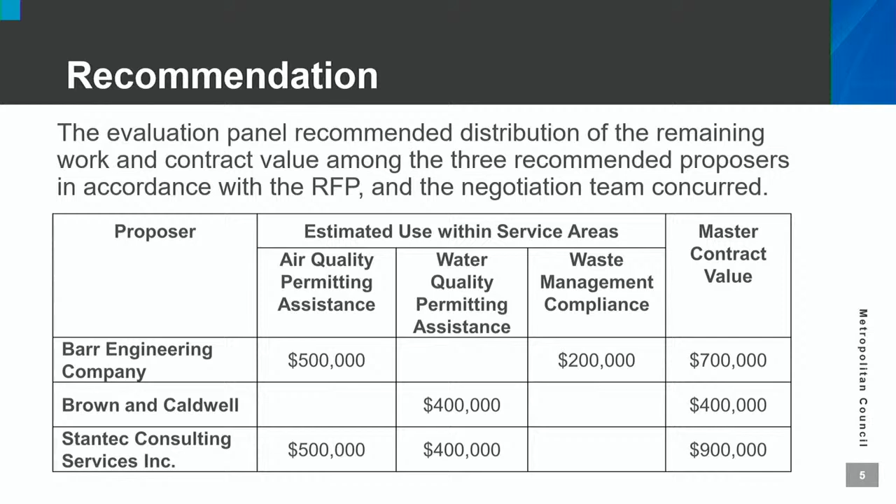The proposed action before the Environment Committee is that the Metropolitan Council authorize the regional administrator to award and execute contracts 23P092 A through C for wastewater treatment plant environmental permitting assistance for a cumulative not to exceed amount of $2 million in service areas and amounts as follows.

Barr Engineering Company, 23P092A, Air Quality Permitting Assistance and Waste Management Compliance, $700,000. Brown and Caldwell, 23P092B, Water Quality Permitting Assistance, $400,000.

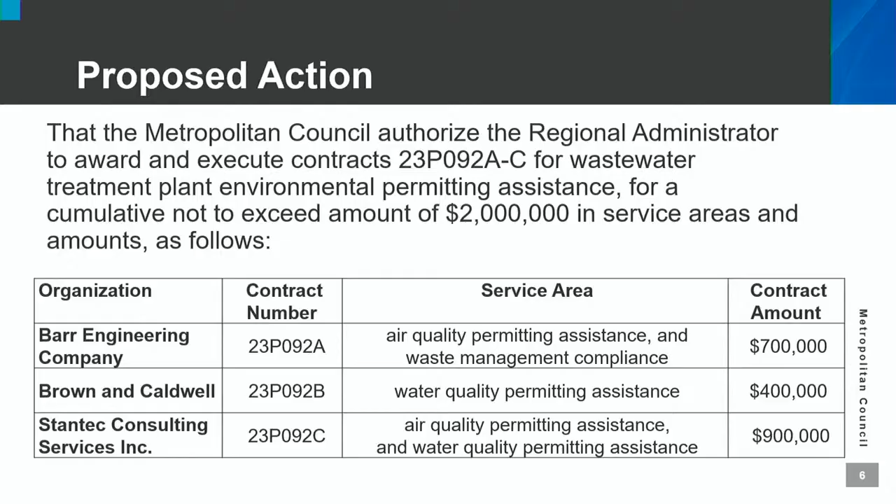And Stantec Consulting Services Incorporated, 23P092C, Air Quality Permitting Assistance and Water Quality Permitting Assistance, $900,000. With that, I could answer questions.

Any questions? Yeah, please, Councilman Carter. Yeah, I was just wondering, just for my enlightenment, the Brooks Act process, is that just engineering and architects, or what does that refer to?

Mr. Chair, yes, since this is a PFA-funded project, that allows us to do first a technical evaluation of technical proposals, and for us to make a selection, followed by the review of cost. So it's the two-step, an evaluation and negotiation, and it has to do with the PFA work.

Public Facilities Authority, right? So it only applies to contracting with engineering and architectural firms, or that's what I'm trying to get at. Thank you. Jody will help. Yeah, because I think it might apply to other contracts as well.

Welcome. Thank you, Mr. Chair, council members, Jody Jacoby, Chief Procurement Officer. So the Brooks Act is for federal contracts where there's licensed and certified staff. The primary consideration, as Rene accurately described, is two-step, to ensure that the consultant has the highest technical rating and they're scored and ranked in that order. Then the cost proposals are sealed and they open up the cost proposal in that order of technical rating and work to negotiate. They do one at a time, but it's that technical rating because of that specialized certification and the requirements, that's of utmost importance.

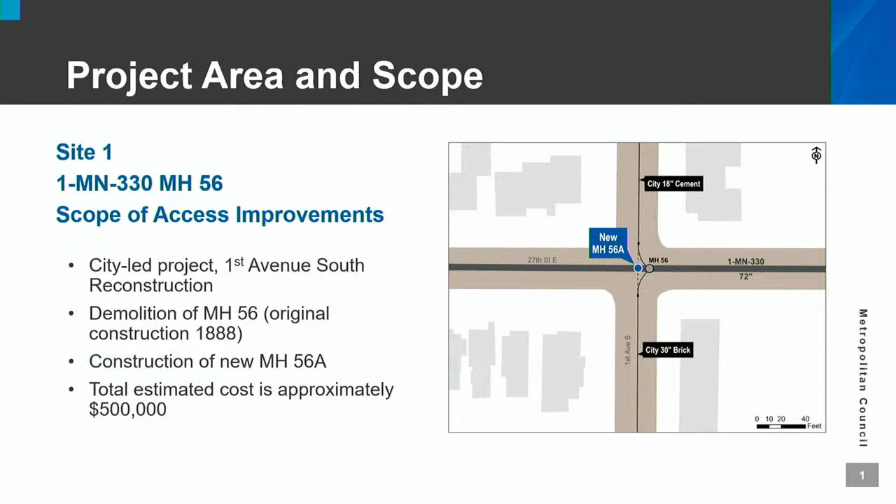The second project that we're working on with the city of Minneapolis is on 1MN310, manholes MH10 through manhole 16. It's part of the city's 2nd Street North sanitary sewer improvements project.

So they're doing some work on the city sanitary sewer. We had planned some work on 1MN310 in this area as well. This is allowing us to get in and do some work on those manholes that we had planned on rehabilitating as part of that project, in conjunction with the city of Minneapolis, so we're not coming back and tearing up their fresh new road again.

So the project, again, is being led by the city of Minneapolis. It includes the reconstruction of manholes 10, 12, 13, 14, 15, and 16, as you can see on that map, extending from Plymouth Avenue North all the way up to just south of West Broadway on 2nd. We'll be demolishing manhole 11 and constructing a new structure.

We're estimating that the total project cost is about $3 million, a little less than $3 million for that work. Part of the reason for that cost is just the depth of the structures there. We're looking at about 30-foot deep manholes that we're going to be excavating in a fairly narrow corridor on top of a 54-inch RCP pipe.

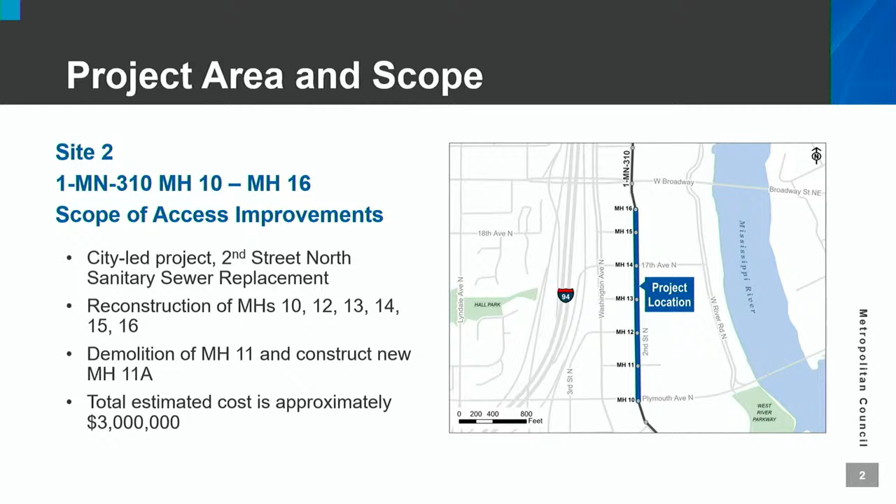So with that, our proposed action is that the Metropolitan Council authorize its regional administrator to execute a cooperative construction agreement with the city of Minneapolis for the design and construction of access improvements to interceptors 1MN310 and 1MN330, for an amount not to exceed $3,500,000. Thank you. Questions for Mr. Wedin?

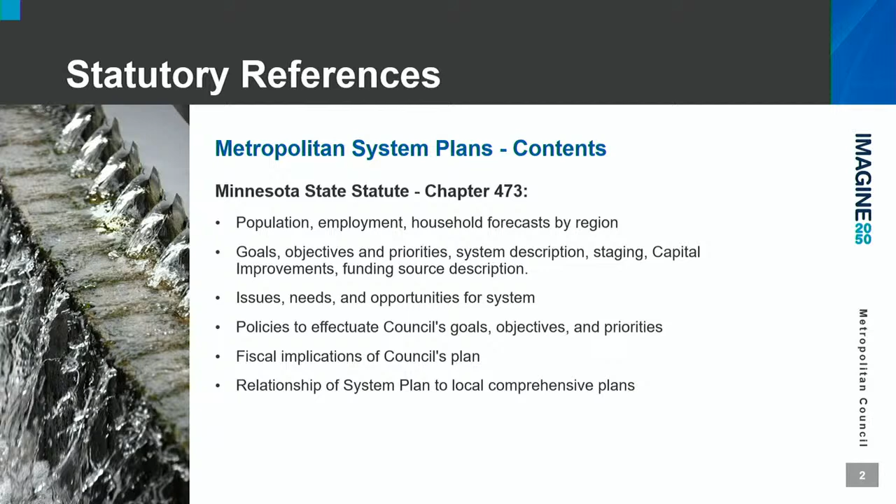Or in some cases, if the local plan is inconsistent with the system plan, the system plan can be updated to reflect the local plan's plan for service. A good example of that was when Credit River came in and requested service for the first time. The system plan at that time had identified service to Credit River as being long-term, post the 20-year planning horizon. So this time around, we will revise the system plan to show that first 20 years of staging, with Credit River reflected in their 2040 plan as being requested for service.

Again, like the regional development guide, the system plan gets updated every 10 years. That outlines a 20-year vision for service provision. It includes the population, household, and employment forecast, as I mentioned previously, and projects the resulting wastewater flows from that projected growth, broken down by community and each of our 9 water resource recovery facilities.

Those wastewater projections are then compared against our system and the system capacity that exists. In cases where we determine that the flow projections exceed that capacity, the system plan will program the necessary improvements that will be required in order to provide that level of service.

I believe we made a presentation here a couple of months ago when we went through the scenario planning, and that was part of the exercise with the initial rollout of forecasts, as we identified what that growth resulting from those scenarios would be, and then identified what system capacity enhancements would be required.

Because the planning period looks out 20 years from a service capacity requirement, and systems are usually built beyond that 20-year planning horizon, it's very rare that we find the forecast in the 20-year period actually represents a need for capacity enhancements, just because the design of the system is well beyond that 20-year period. So it's very rare that system capacities or system improvements need to be included in the system plan. It does happen, and this system plan will include some improvements that reflect a need to accommodate future growth.

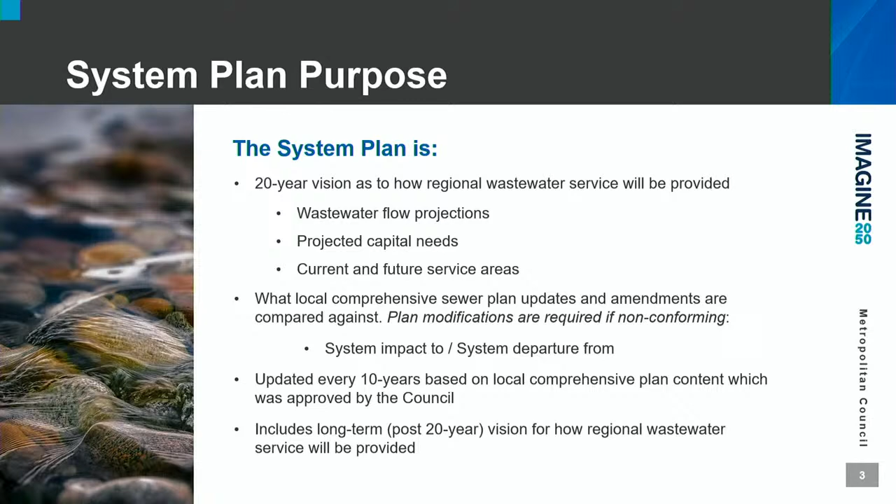This slide here basically was the same slide that I presented back in August. It provides a high-level overview of the system plan content, so I won't go through it again. However, I think it's important to point out that the system plan focuses on that first 20-year planning horizon, but it also identifies some of those post-20-year projects that we have identified as being necessary to accommodate the long-term growth.

There is one note on here, looking at this slide, something I didn't actually pick up in August. It does identify Cologne as a future facility, and in the system plan - both the last one and this proposed plan - it identifies the need for a treatment facility in Carver County. It's likely that regional facility will be centralized somewhere in Carver County, and when you look at a map, the city of Cologne is pretty much in the center of Carver County. So the intent and likelihood would be that this long-term Carver County facility would be located somewhat centrally in Carver County, but probably in close proximity to the Minnesota River. I just wanted to point out that the site for the Cologne facility has not been identified yet - that would be part of a future study.

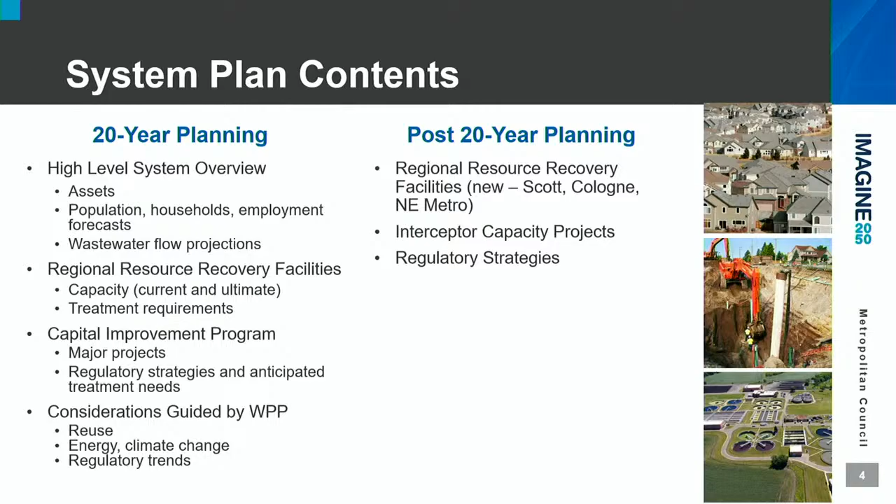So I mentioned that these areas represent what could be served with our existing facilities, but I will say the regional wastewater system is expanded as necessary to facilitate development in the communities consistent with their approved comprehensive sewer plans.

So our upcoming work ranges from acquiring a site for a future Scott County water resource recovery facility, to a new interceptor to serve the Elko New Market and Farmington areas to relieve some interceptor capacity concerns, to serving the Hastings area with new infrastructure.

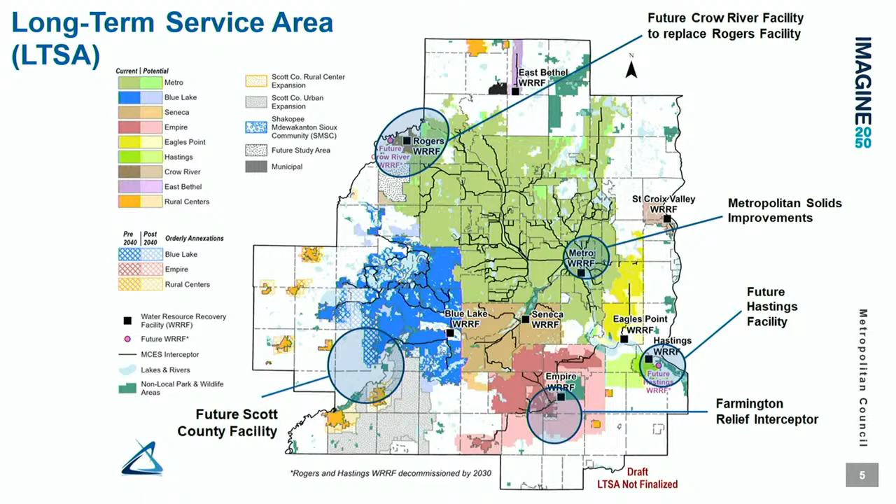Councilmember Wolf has a question or a point. Thank you, Mr. Chair. When I started at the council, it was $4 billion. So, I last heard 7. Yes. Wow, that's more than double.

Yeah, significant, indeed. So for how those areas are determined, we consider a variety of inputs. We look at the capacity of each water resource recovery site, considering future regulatory scenarios. We look at the potential developable surface area that could be served by each facility. We look at the capacity of existing interceptors, the potential for new water resource recovery facilities and service area revisions. And then we consider wastewater generation rates, which are based on location, proximity to transit, and major highways and physical features of the area. So there's a lot of different components that go into how that map is developed.

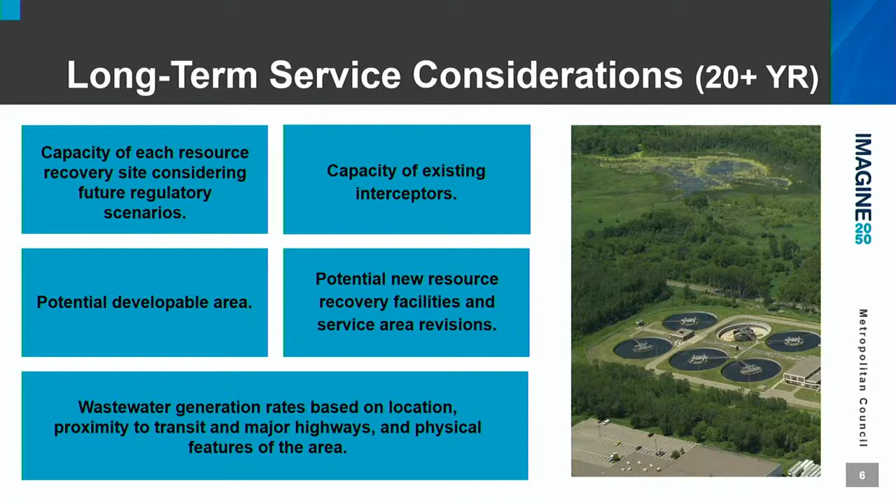So the system plan also describes our capital program, which provides capital investments to preserve and rehabilitate our wastewater infrastructure, meet more stringent water and air quality regulations, and expand the system capacity to meet regional growth needs.

As mentioned before, our projects span the entire region in different types of infrastructure. Some of our projects at a high level include interceptor rehabilitation or new construction, same with lift station and flow metering, and then resource recovery facility work, which could be expansion, upgrades, rehabilitation, as well as solids processing improvements.

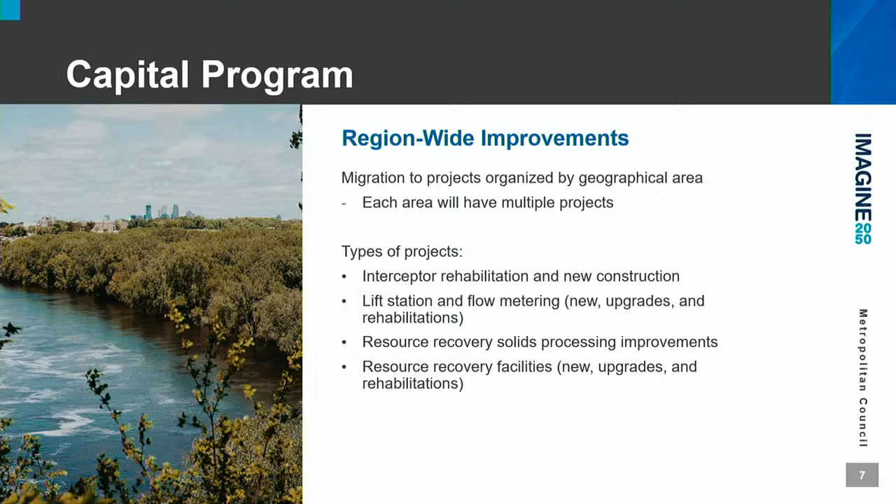So the projects in our capital program are categorized into the 3 objectives on the slide. We have asset preservation, which preserves our existing investments. We have system expansion, which are projects that expand our system capacity through resource recovery facility or interceptor extensions. And then quality improvements, which may address safety, regulatory standards, sustainability, et cetera.

The amount we spend in each objective varies year to year depending on what's in the capital program. From 2014, a majority of the funds were spent in the asset preservation category. In the near future, we may see a shift where the majority of funds will be spent under the system expansion category as we expand with new water resource recovery facilities, facility work, and related interceptors.

In the next 6 years, we see projected capital investment split to 37% on interceptor work and 63% on resource recovery facility work. We use the estimated value and the useful life of our assets to identify an asset preservation investment objective, or our annual target spending amount to maintain the system.

So ignoring the $9 billion value I just shared, previously to this round we were using $7 billion as the present value of our infrastructure. Using that value and the average useful life of our infrastructure, we set a goal of spending 1.8% of the asset value per year, or around $130 million in rehabilitation. We feel that that level of investment is necessary to maintain our system.

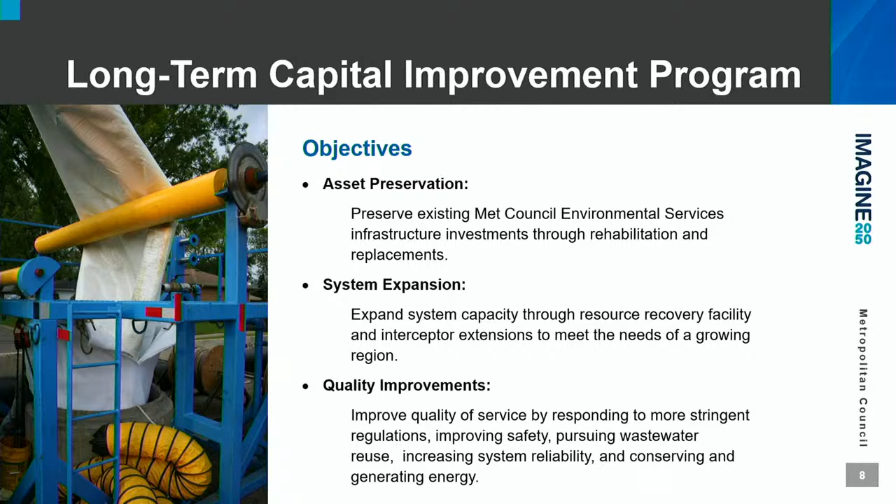Here's that other slide I referenced with some upcoming projects. Again, you can see it spans all types of infrastructure across the region. We spend about $110 million on average per year on capital projects. In the first part of this planning cycle, over the next 5 years, we might see a higher spending rate because we have a few larger projects using our design-build project delivery method. These include water resource recovery facilities, solids processing improvements at the Metro facility, an office and lab update or new building at the Metro facility, and a Scott County resource recovery site acquisition, just as a few examples.

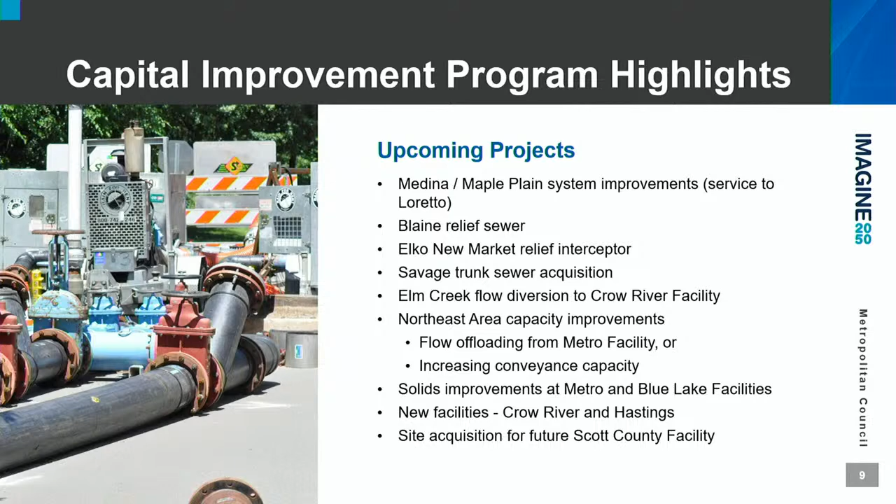So this system plan is just a continuation of the 2040 system plan. The wastewater long-term system planning capacity time horizon goes beyond the 20 years of the regional development guide; we're more of a 70 to 80 year planning cycle. Overall, population forecasts from the regional development guide normally don't exceed what we're expecting in the next 20 years for the wastewater planning horizon, so we don't have too many new additional capacity enhancements or investments other than what's already in our wastewater system plan.

Another component of the system plan is our resource recovery strategy. As supported by the change in name to water resource recovery facilities, we continue to invest in activities that recover resources—for sure water, but also energy and nutrients—and we investigate other opportunities. In the system plan, we describe current and future resource recovery opportunities, the things we want to do more of, and the things we're keeping tabs on to potentially implement in the future.

Our current efforts include water, through our wastewater treatment process, where our product is the clean effluent downstream with discharge to receiving water bodies. We have energy and heat recovery—we recover heat from incineration of solids waste, and we harvest biogas from biosolids production. Biosolids is also a resource we recover; it's a nutrient-rich fertilizer we provide to local farmers and other partners. We also have internal reuse at a few plants for internal application like cooling and wash water.

In the next 20 years, we are investigating and may implement, if and when practical, thermal heat recovery from wastewater effluent, and regionalizing our solids management so the entire region can benefit from those recovered resources. We'll look at other heat recovery opportunities at our facilities and continue to support wastewater reuse efforts across the region.

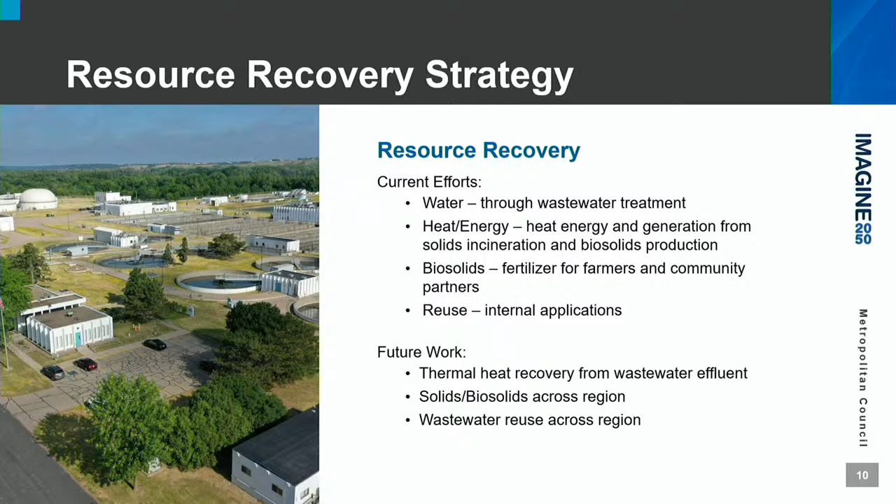Specifically, for phosphorus, in response to past regulation, the Met Council has taken around a 70% reduction in permitted total phosphorus levels since 2010. Most of our water resource recovery facilities now have biological phosphorus removal systems and consistently meet standards.

For nitrogen, we've just recently received a nitrogen reduction strategy plan for wastewater treatment facilities from the MPCA. This document will include the nitrogen reduction plans that will be added to our wastewater permits during their reissuance. We just got that this month, so we're in discussions for next steps and our response.

For sulfates, an existing 1973 water quality standard, implemented to protect wild rice, will be implemented in the NPDES SDS permits. This will likely affect most of the Met Council water resource recovery facilities.

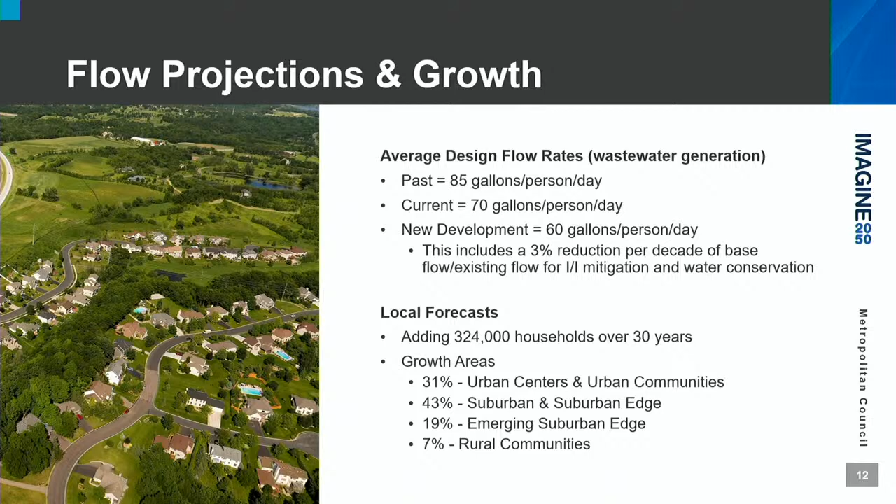This is all for the overarching goal to have the Regional Development Guide with the water policy plan approved at the start of the new year, 2025. You'll have an opportunity to review the system plan when this and the water policy plan are released. But if you have any questions ahead of time or comments, please let us know. You don't have to wait until July.

All right, and we'll take any questions. Thank you very much, very thorough and interesting report. Questions from the committee? Councilmember Wolf.

Thank you, Mr. Chair. Can you give a little more detail about the Elko New Market Farmington project?

Yes, Mr. Chair, committee members, Councilmember Wolf, I expected we'd probably get that question. When the city of Elko New Market was provided service, it was through a request through the comprehensive plan. It was to basically phase out the local wastewater treatment facility that they had. When the system was built to phase out that facility, it directed flow to an existing part of the interceptor system that's located through Lakeville and Farmington. It was an interim basis for providing that service, borrowing existing capacity.